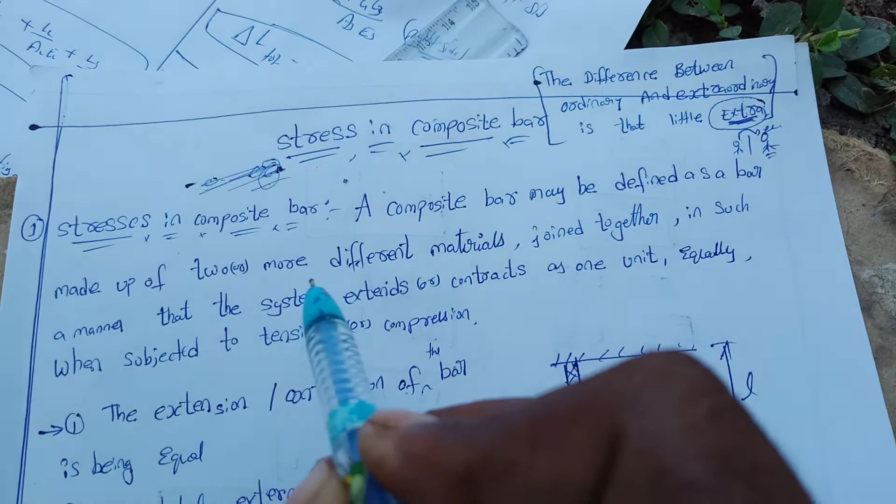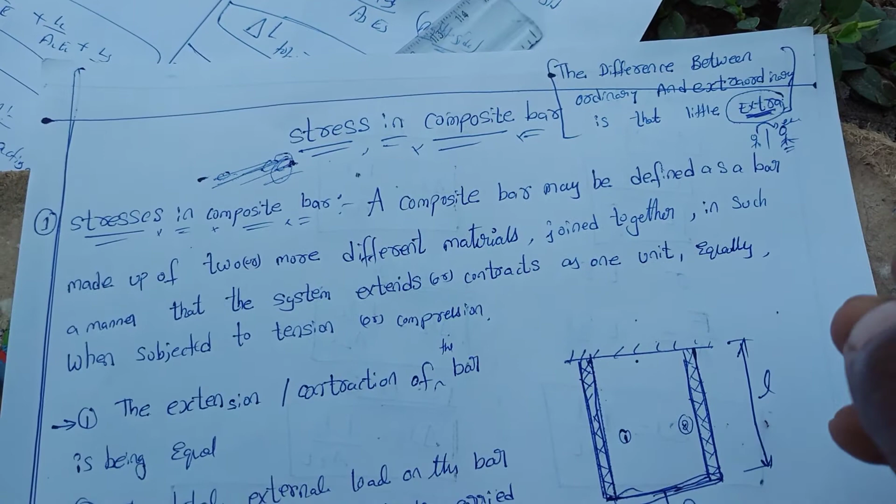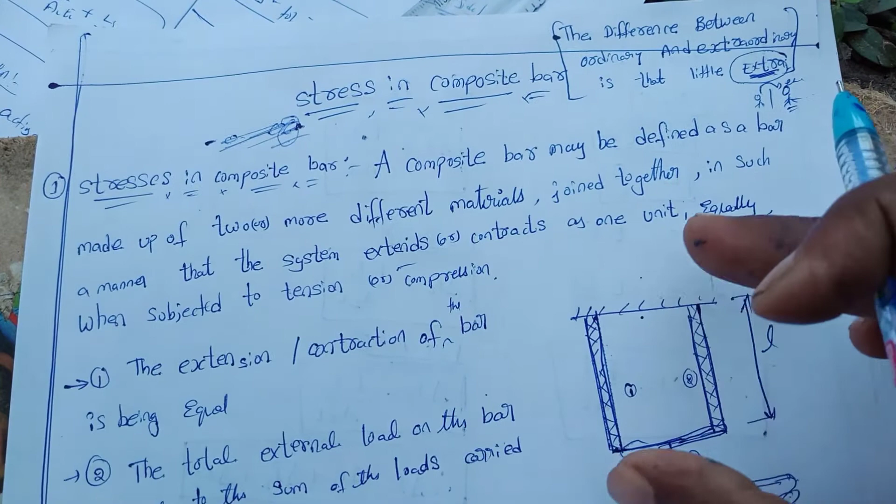Okay, the composite bar may be defined as a bar made up of two or more different materials, like cast iron, aluminum, silver, etc. They are joined together in such a manner that the system extends. For example, this is 10 meters. Once I apply the load, it changes by some 2 meters. Here the total changes to 12 meters. Like that, this is an extension.

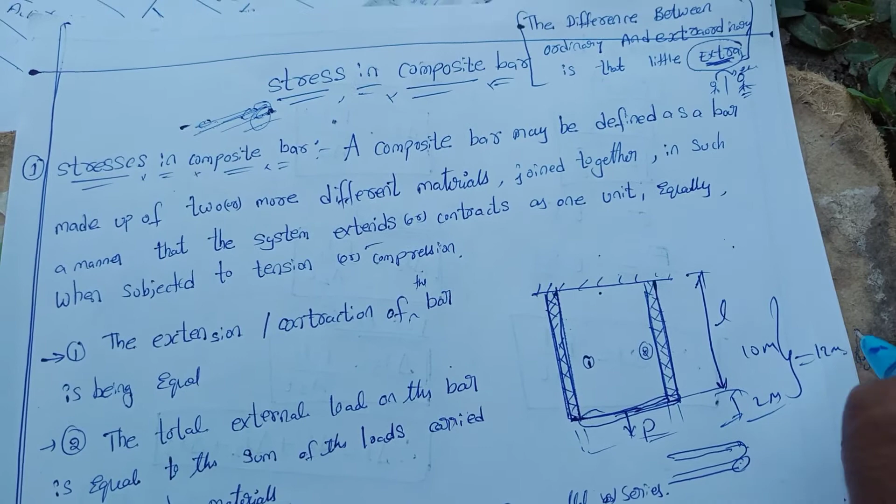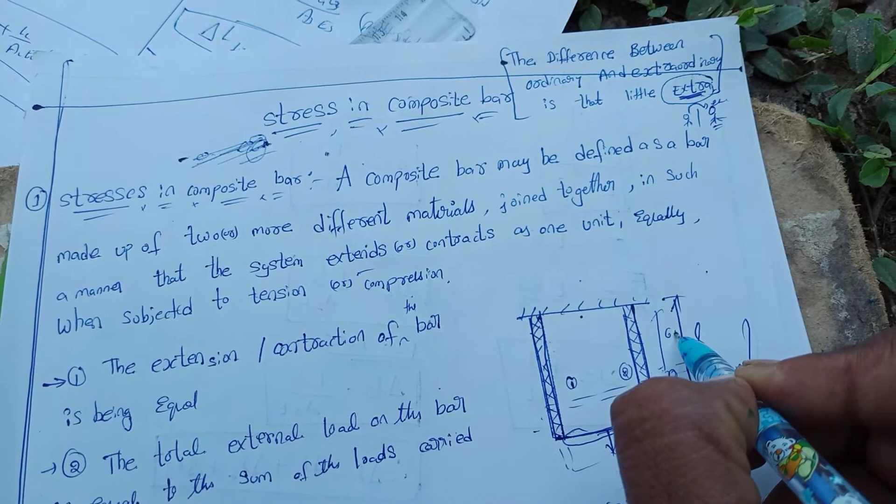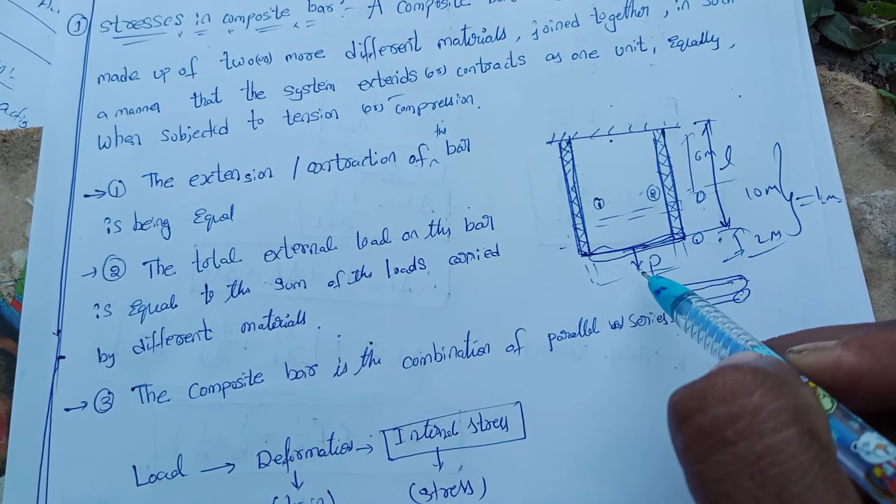Or contraction. Once it is compressed, the material comes from point 1 to the second position. This height we can take as 6 meters. Then it is nothing but compression. It contracts equally as one unit when subjected to tension or compression. For extension we use the term tension, and for contraction we use the term compression.

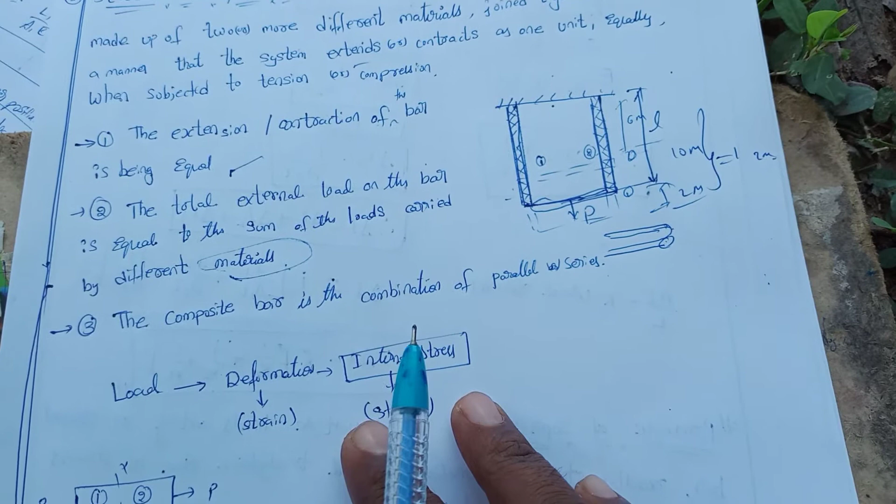Next, the composite bar is a combination of parallel or series. Here the composite bar may be parallel, or series. This is a series. Once we apply any load, deformation occurs. This is deformation, meaning change. So strain is produced. Whenever deformation takes place in a body, here we consider an elastic body. In strength of materials we consider only elastic bodies; in engineering mechanics we consider rigid bodies.

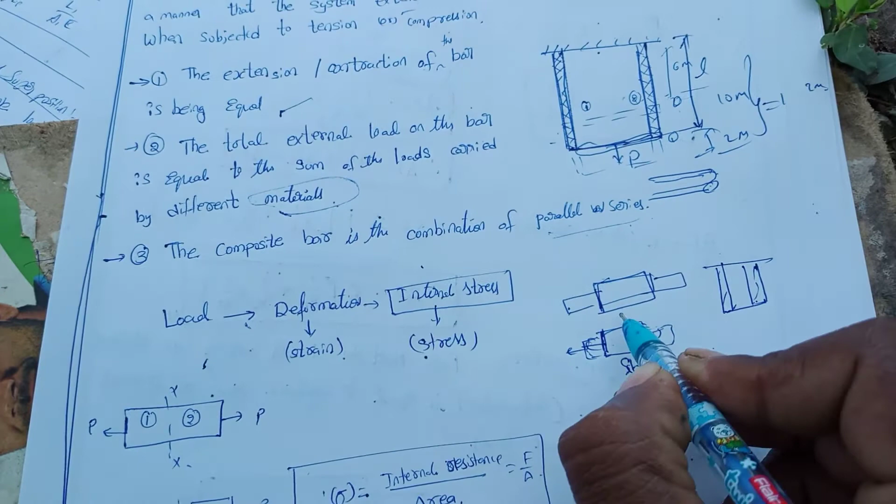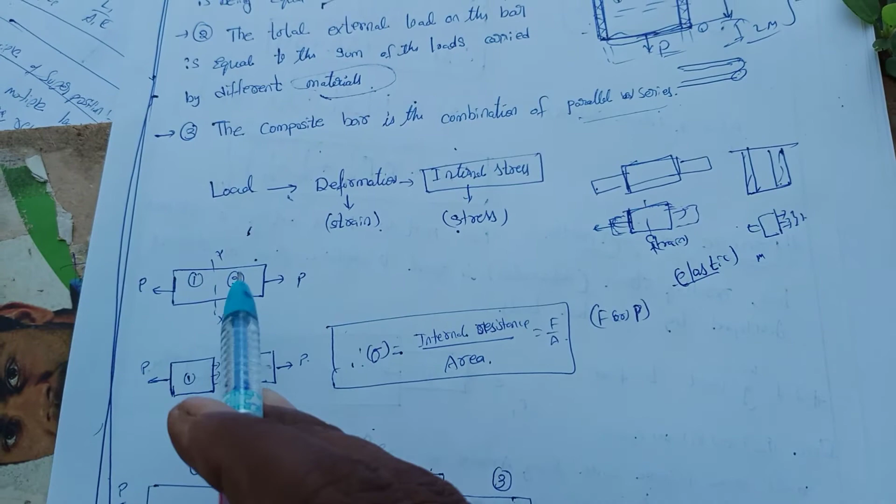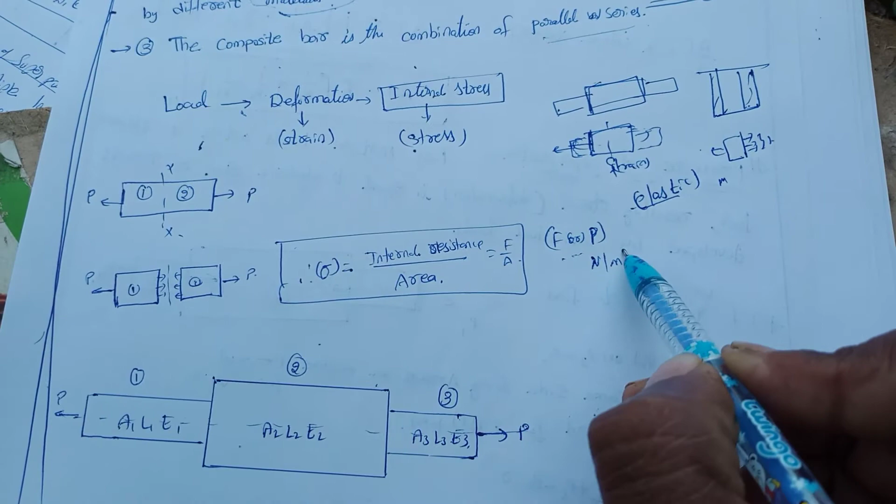Next, after deformation, some internal resistance takes place. This is the cut portion. These are the internal stresses. This is one bar, divided like this. Stress is nothing but internal resistance per area, F by A; we can denote it F or P. Units are Newton per meter square or centimeter square.

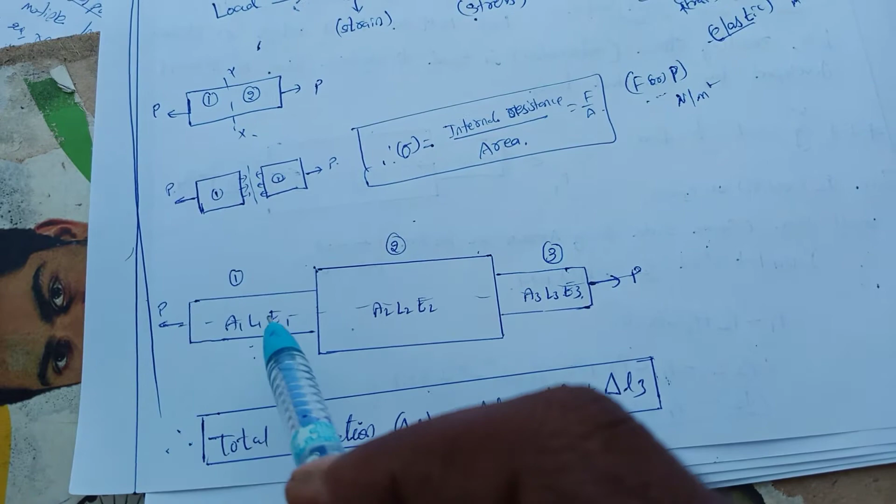This is section 1, section 2, section 3. For each there will be some area, length, Young's modulus. To find the total deformation we add delta L1 plus delta L2 plus delta L3. You may ask, sir, how can we add this delta L? Don't worry, we have a scientist, Hooke. He gave Hooke's law: stress is directly proportional to strain.

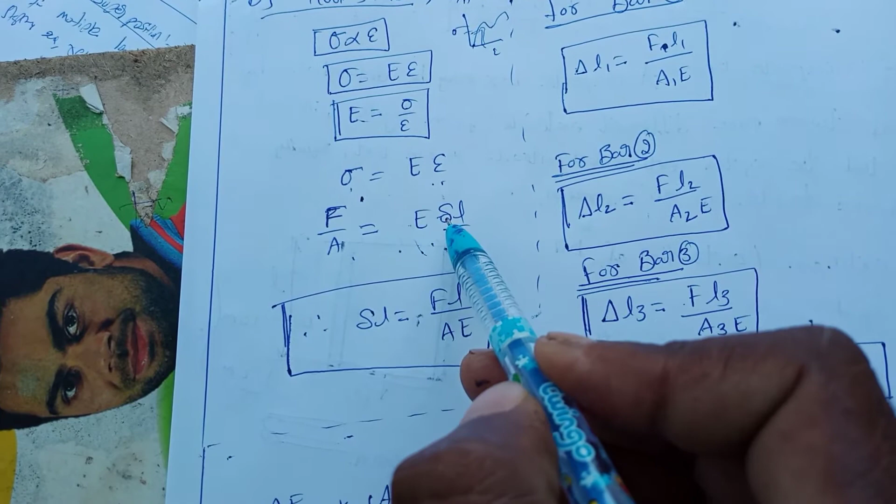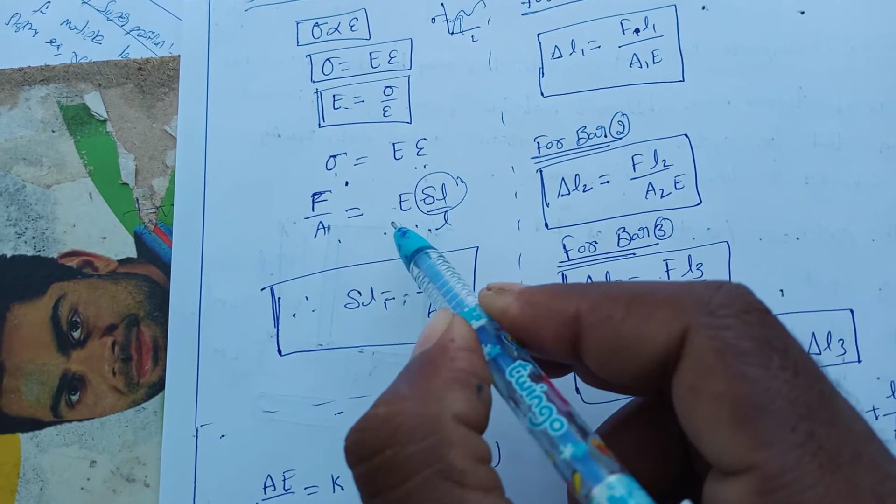This is the stress-strain curve. Stress is directly proportional to strain up to the elastic proportionality limit. Removing the proportionality sign, we replace it with E, so stress equals E into strain. Sigma equals F by A, internal resistance per area, and strain is change in length by original length. By cross multiplication, delta L1 equals FL by AE. This is the formula for finding the change in length, delta L1.

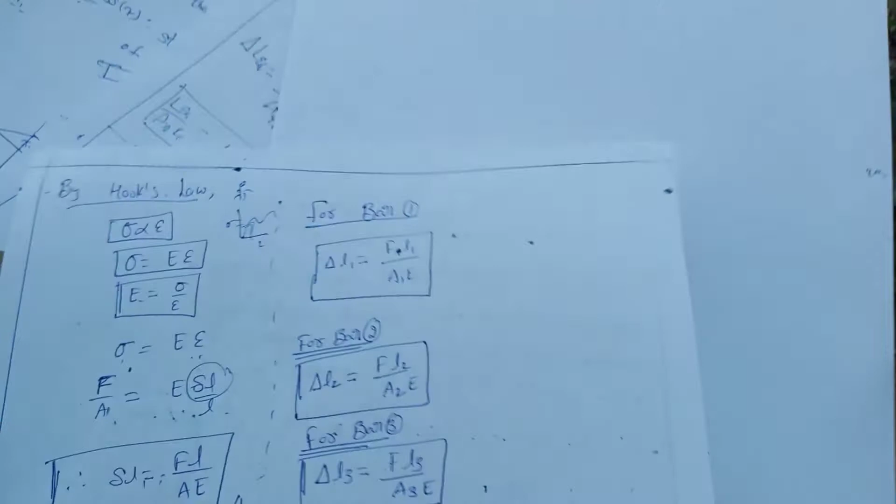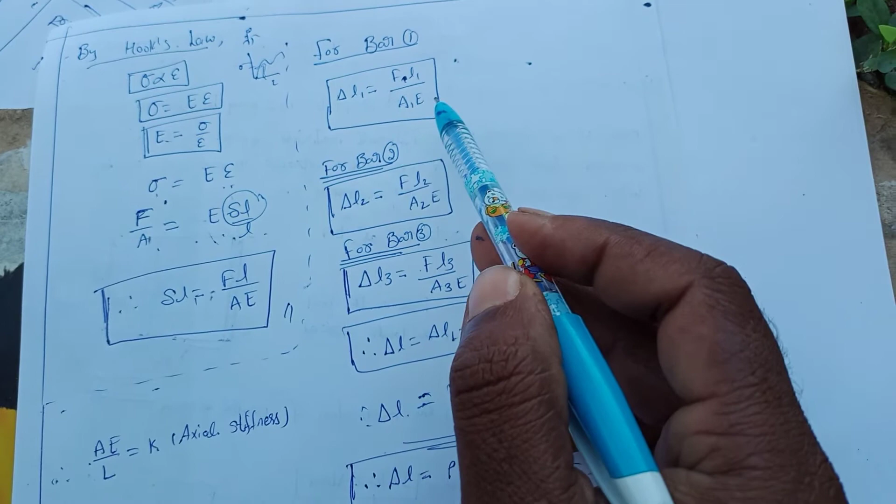Okay, next, if you are taking individually, separately, for bar 1: delta L1 is nothing but, if the force is common, then you don't want to write F1, F2, F3 like that. Simply F into L1 by A1 E. Next, for bar 2, same F into L2 by A2 E; in the question only they gave E, Young's modulus. Next, for bar 3, same F into L3 by A3 E.

Then finally, if we are taking F as common and adding delta L1, delta L2, delta L3, we get F into L1 by A1 E plus L2 by A2 E plus L3 by A3 E. Or we have one constant, we can write AE by L equal to K, that is axial stiffness. So therefore P into 1 by K1 plus 1 by K2 plus 1 by K3.

Okay, up to this I think you are clear. We are just applying one formula; by using that formula, however much load you put on the object, we can easily find it. Okay, that's it. Next one, principle of superposition.

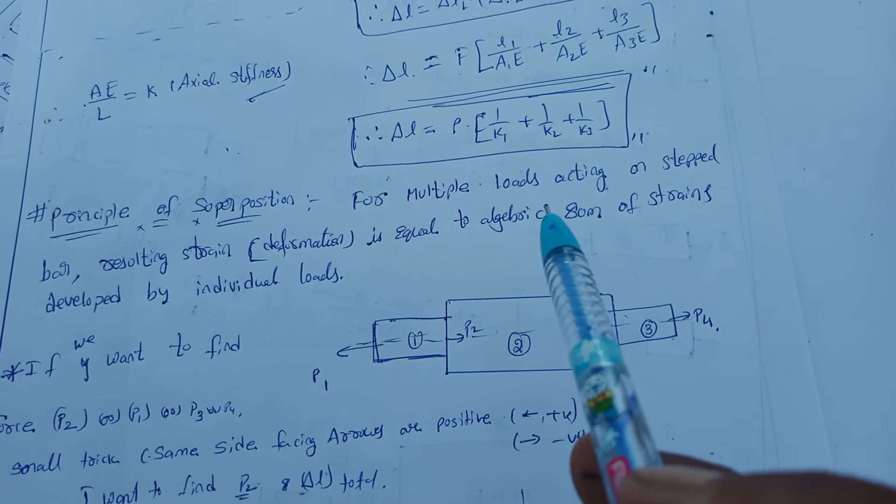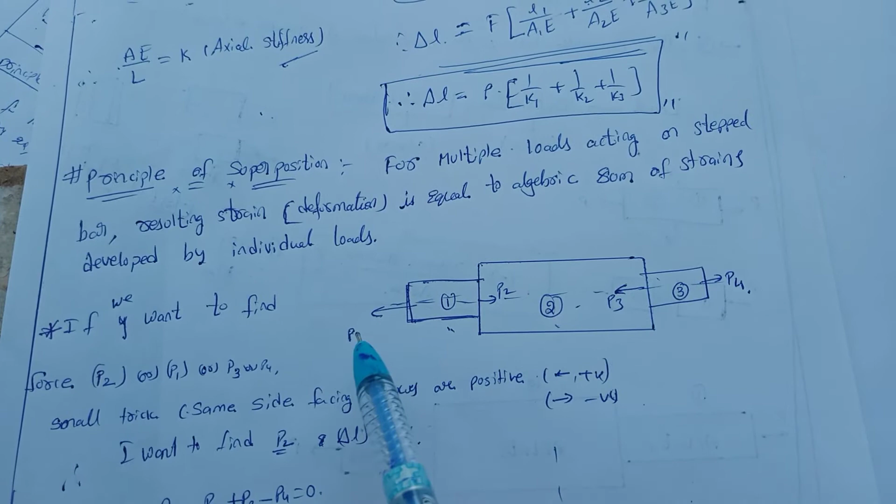We can see the definition: for multiple loads acting on the stepped bar, this is a stepped bar, the resulting strain, here strain is nothing but deformation, is equal to the algebraic sum of the strains developed by the individual loads. Here I am applying the load on bar 1, bar 2, bar 3, means different loads. P1 is acting like this, P2 is acting in the opposite way, P3 is acting on the left side, P4 is acting on the right side.

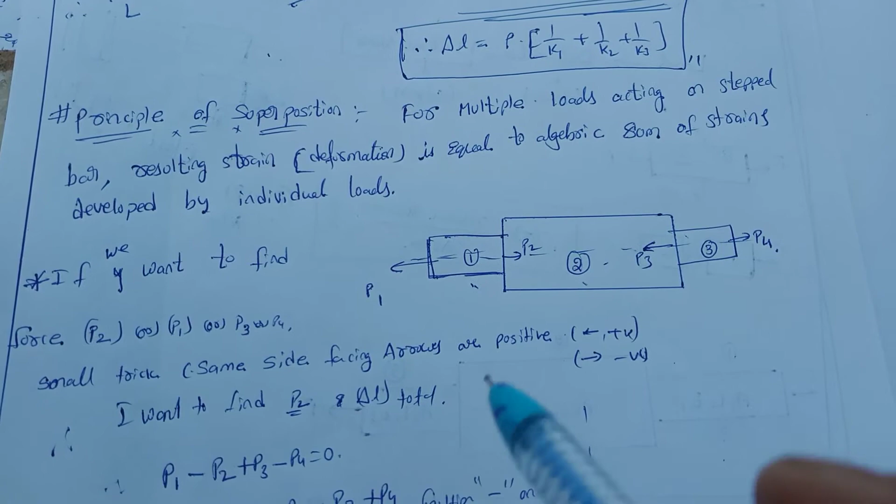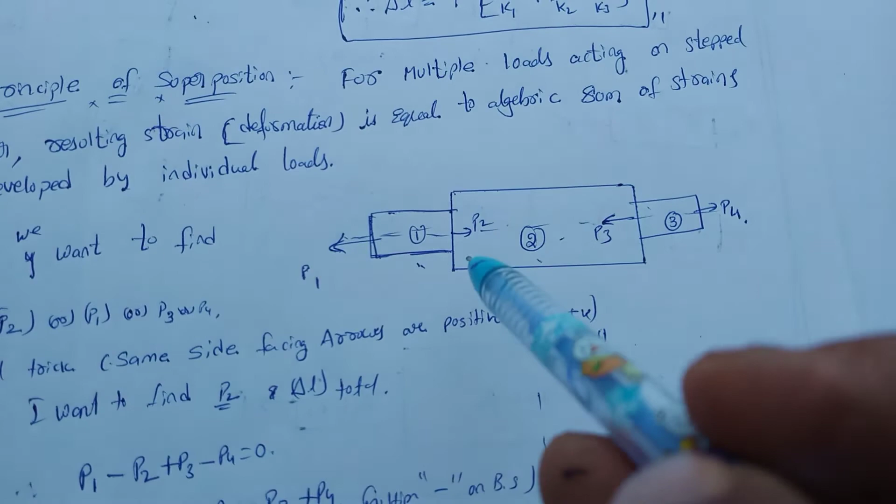Okay, then if you want to find out P1 or P2 or P3 forces, there is a small trick. Here there is an arrow showing. If it is showing in the leftward direction, we can take it as positive, and if it is showing in the rightward direction, we can take it as negative sign, or vice versa, your wish.

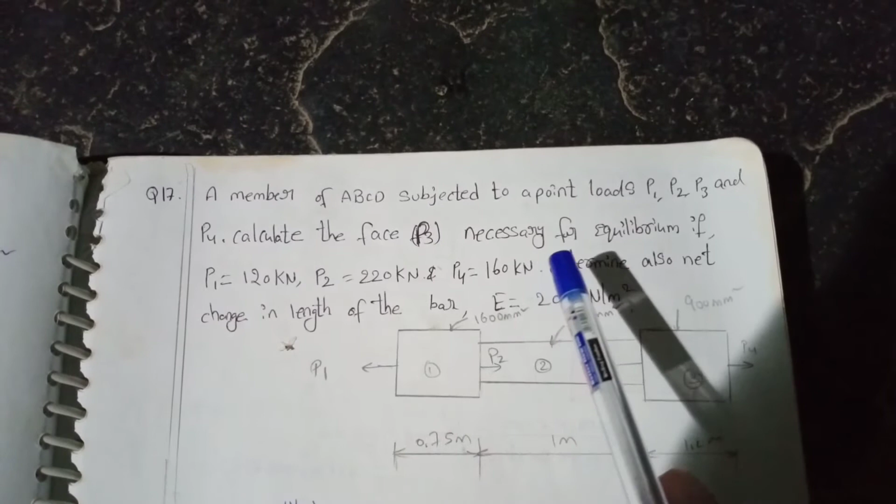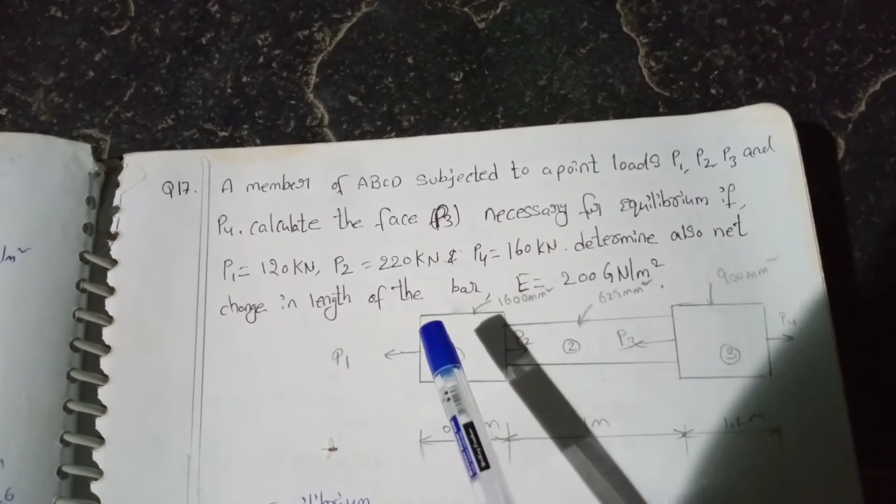Calculate P3, the force necessary for equilibrium, if P1 is equal to 120 kN, P2 is equal to 220 kN, P4 is equal to 160 kN. Determine also the net change in length, delta L, of the bar. E is equal to 200 giganewton per meter square.